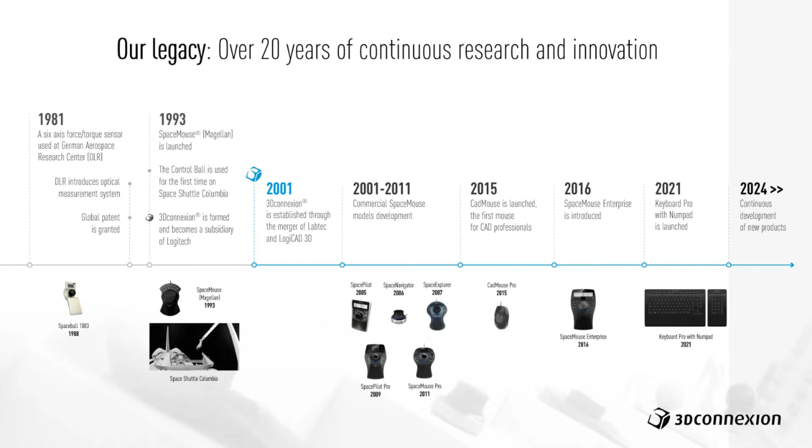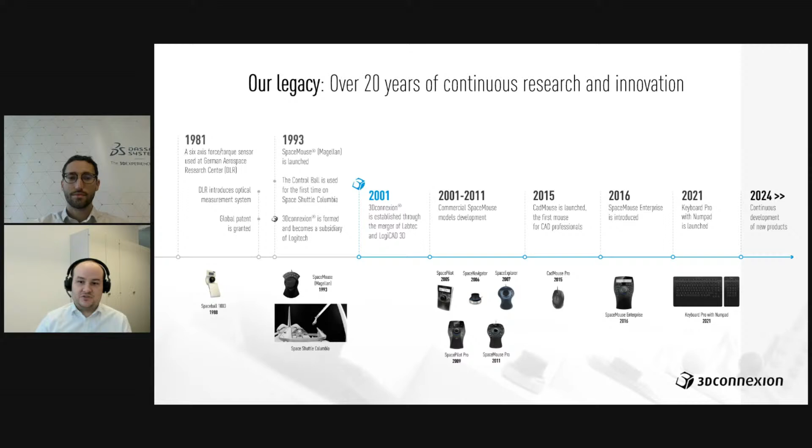Today, we are a globally established company with offices in Germany, Japan, Monaco, Poland, the US, and with partners and customers all over the world. This actually makes us the leading manufacturer of high-quality ergonomic hardware and powerful software for users of 3D applications. Okay, this is already a rich story. So, can you tell us a little bit more about your products?

Certainly. Let me first start with the SpaceMouse family. We currently have 5 different models in our portfolio. From the small entry-level devices, such as the SpaceMouse Compact and its wireless sister, the SpaceMouse Wireless, to our professional workhorses, the SpaceMouse Pro and its wireless counterpart, the SpaceMouse Pro Wireless, all the way up to the top-of-the-line product, SpaceMouse Enterprise. The 2 wireless devices are the newest in the portfolio, and they now also come with Bluetooth and USB-C.

In addition to the SpaceMouse, we also have the CadMouse in our portfolio. These are computer mice, so 2D mice actually, that have been specifically developed to meet the requirements of demanding CAD software users. The right-handed user uses this with the right hand while simultaneously navigating the SpaceMouse with the left hand. So this means working with 2 hands. We offer the CadMouse both wireless and wired in a compact and standard size, as well as a left-handed version.

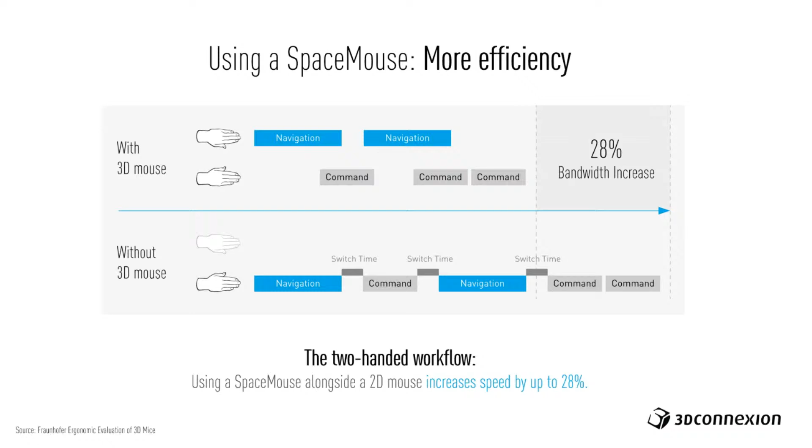Yes, let's do so. I've only one more slide before we dive directly into a quick demo of the SpaceMouse. What you can see on this slide are the results of a study from 2018 that looked at the two-handed CAD workflow with SpaceMouse and CadMouse. For a right-handed user, SpaceMouse on the left hand, CadMouse on the right hand. The SpaceMouse was used for navigation, and the CadMouse used for command input.

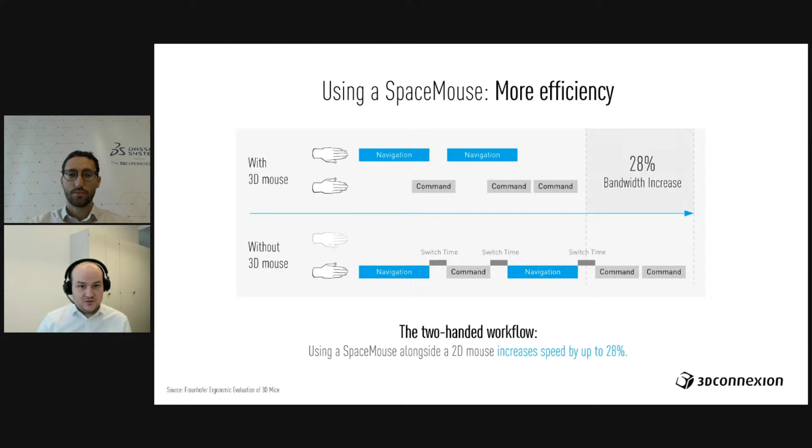To put it in a nutshell, it can be seen that the parallel navigation and execution of commands greatly reduces the strain on the hand caused by the standard 2D mouse, and it increases efficiency at the same time.

Okay, yeah, you're right. This is where our collaboration really makes sense, actually, because we share the same goal of increasing the productivity of designers and engineers through an efficient workflow. And I even know colleagues at Dassault Systèmes who are enthusiastic advocates of the SpaceMouse and use it on a daily basis. Cool. Yeah, but exactly. Now let's jump into the demo so we can finally see the magic I've been talking about.

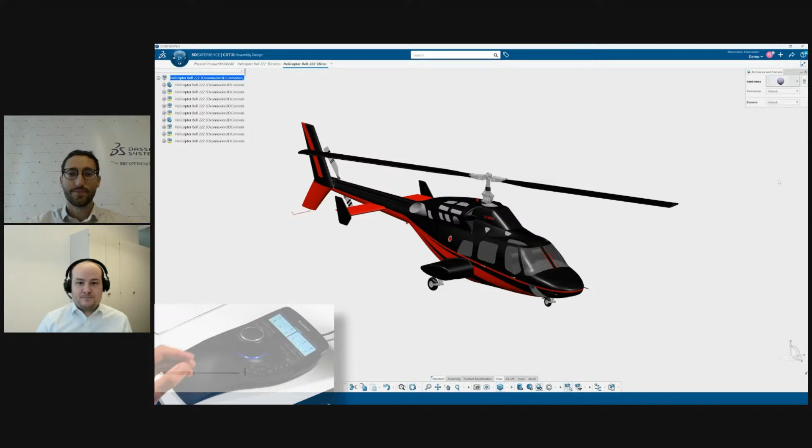The heart and magic of the SpaceMouse experience is its intuitive navigation. The cap of the SpaceMouse corresponds to the object on your screen, allowing you to move along the axis simultaneously. You can see here it's very fluid, and you can orbit this helicopter very nicely.

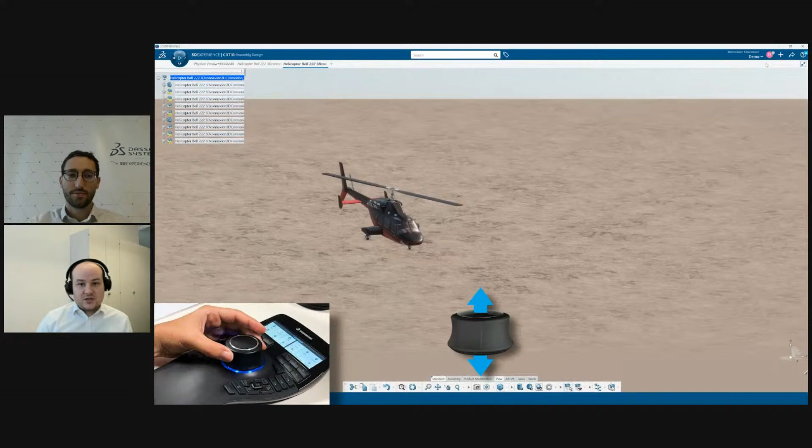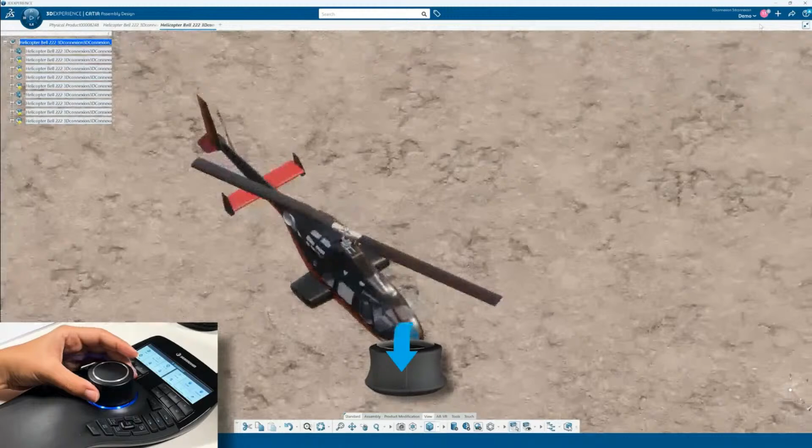This means moving the cap up and down, towards you, away, twisting, or tilting, or any combination of these movements moves your object in the corresponding direction. The cap is very pressure sensitive—the amount of pressure you apply determines the speed and extent of the movement, allowing for very fine control.

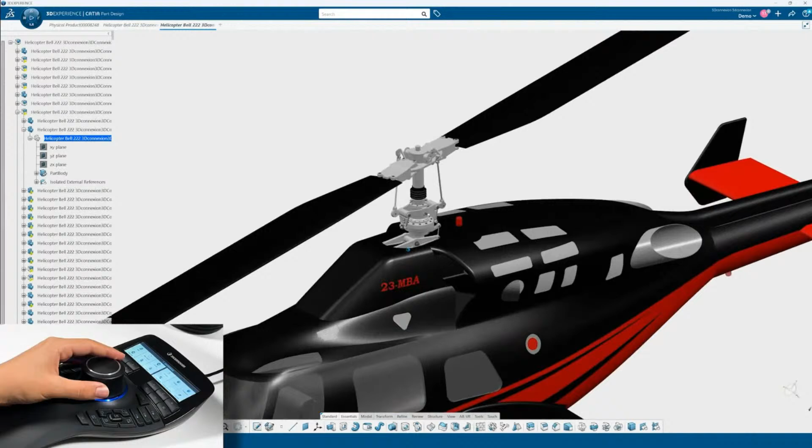Navigating within an assembly becomes very intuitive with the SpaceMouse. The precise sensor makes navigation smooth, comfortable, and highly immersive. As you can see, it is very easy to zoom into a detail or examine difficult angles. This allows you to understand and explore your model in a way that is very hard to reach with a standard mouse. The deep understanding gained through the SpaceMouse helps to find solutions and avoid mistakes.

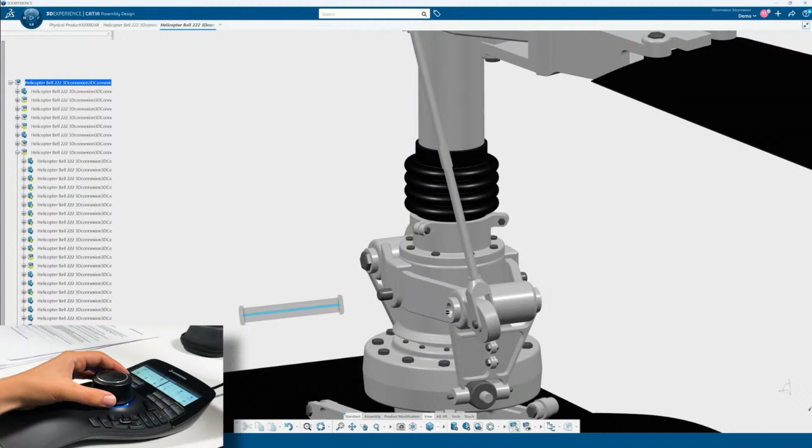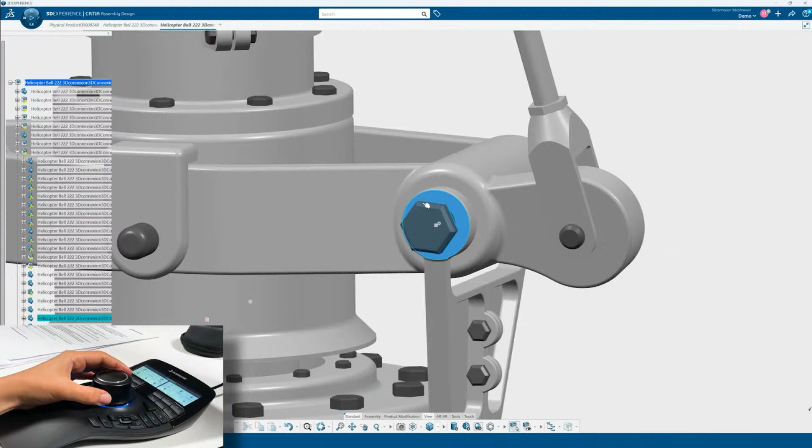In CATIA specifically, the SpaceMouse makes positioning and inserting parts easy. Here, the cap allows you to even move parts within an assembly independently of the rest—so you see the helicopter stays and the bolt is moved with the SpaceMouse cap. It is very intuitive to navigate around the objects, zoom into a hidden face, and select parts to apply constraints, all with fluid and natural motions. This way, the SpaceMouse enhances your workflow by providing precise, intuitive control over your CAD environment.

Yeah, this is a very nice example, and I recognize the beautiful model from my colleague Alain Dugousset. Very beautiful. Yes, amazing. So in this way, you keep total control of your model by making the most precise adjustments possible to design and validate right the first time. Yes, exactly.

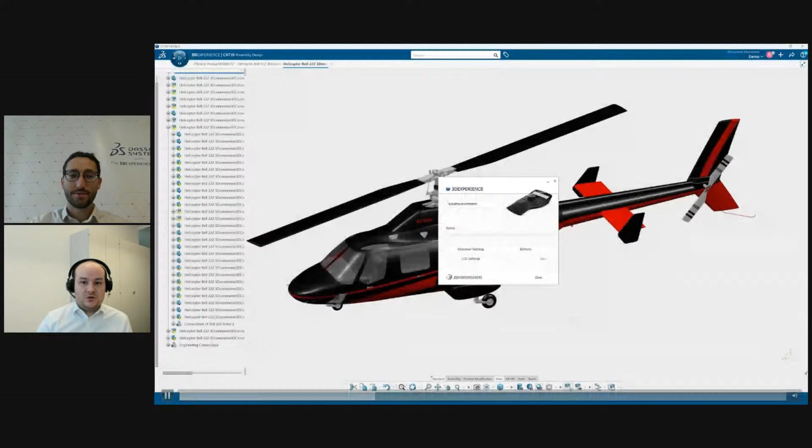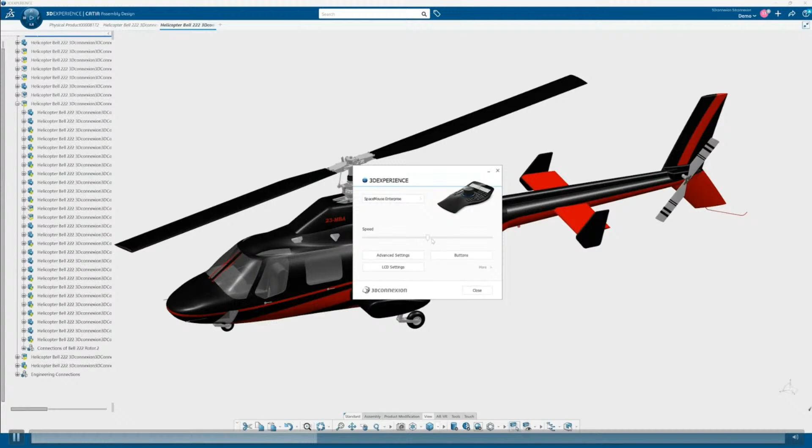And if you want to change settings, you can adjust all the navigation settings to perfectly fit your needs. For example, specific axes can be locked or unlocked depending on the task at hand. You can also invert the direction of movement or customize how different movements of the cap should behave within CATIA, and customize the speed per axis to match your personal preferences.

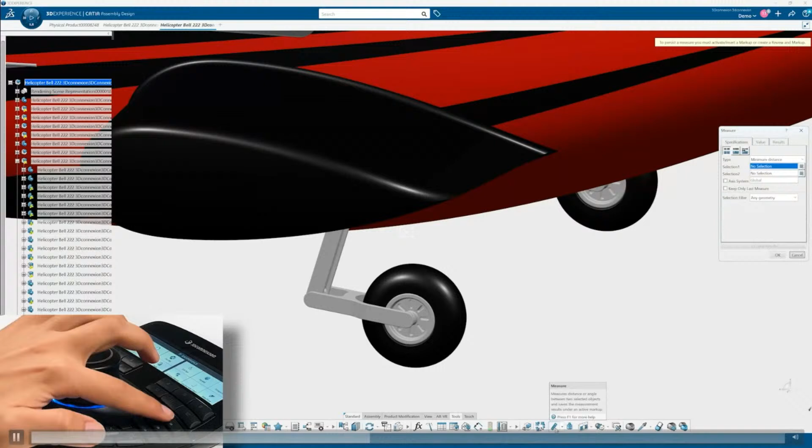Now let's move to another aspect of the navigation, and that's using the keys. Often we have favorite views, and we need to switch continuously between them. With the custom view keys, you can save your personal views and switch between them instantly. For example, we can save view 1, the first wheel, and view 2, the second wheel, then instantly switch to the first wheel, perform a measurement, switch back to the other wheel, and perform the same measurement. This greatly enhances your efficiency and precision in your workflow.

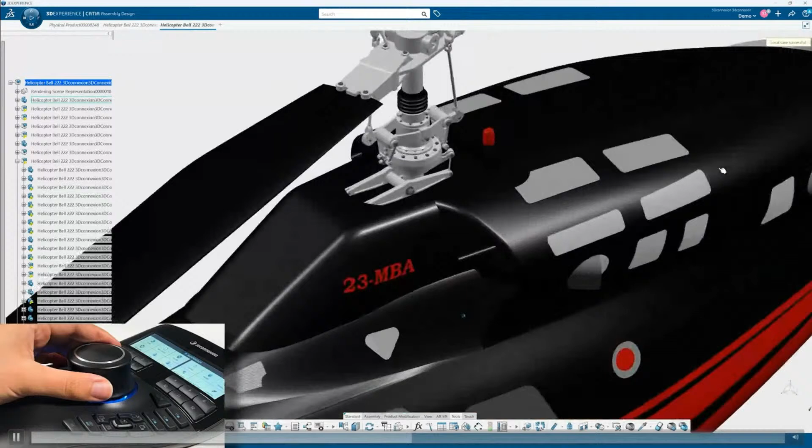With the SpaceMouse, you also have other view options that are handy in your workflow. For example, if you zoom in too much and got lost in your assembly, you can instantly center your model with the Fit key. Additionally, the Quick View keys provide one-touch access to standard views. Here we switch from front to rear, then top, right, and ISO, all with just one press each time.

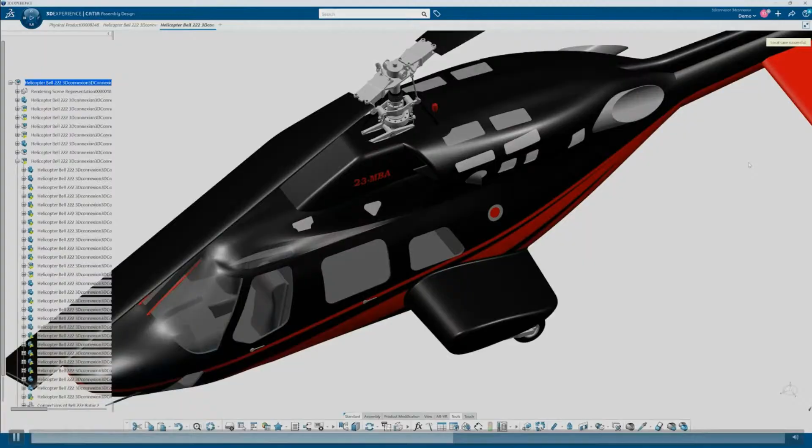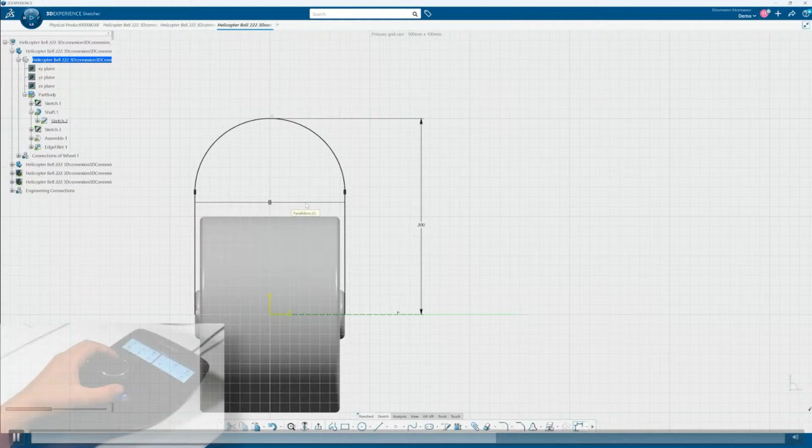Sometimes you need to navigate in 2D or limit certain movements when you're in a sketch, like rotation. With the SpaceMouse, you can easily lock the rotation using the rotation lock key. You can also adjust your settings to activate or deactivate specific axes. In CATIA specifically, the SpaceMouse even recognizes 2D environments like your sketch and automatically locks the rotation for you, allowing precise control and focus on your work.

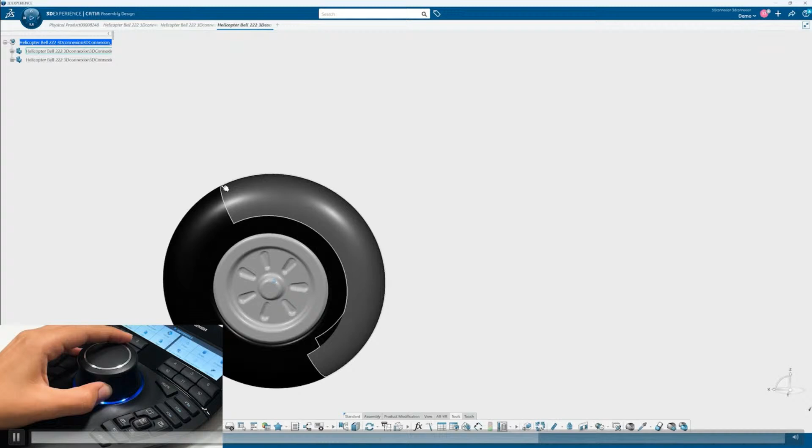On the left side of the SpaceMouse Pro and SpaceMouse Enterprise, you find the keyboard modifiers, and they minimize switching between the keyboard and the SpaceMouse. For example, you can quickly select a part, delete it, and continue navigating without any interruption, so you don't need to move to the keyboard. The combination of keyboard and SpaceMouse functionality enhances both efficiency and precision in your CAD workflow.

So if I understand correctly, in addition to being more efficient, it also allows you to feel more comfortable using your SpaceMouse on CATIA by choosing the most appropriate settings.

Absolutely. And when using the SpaceMouse for the first time, you could start off with a slower speed and adjust it in the driver. Once you feel more comfortable with navigating, you can slowly increase the speed until you find your personal preference, and then just keep it there. Okay, that's great.

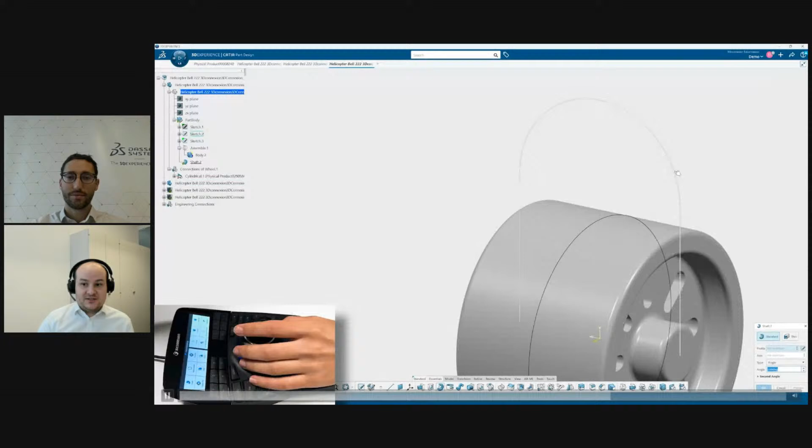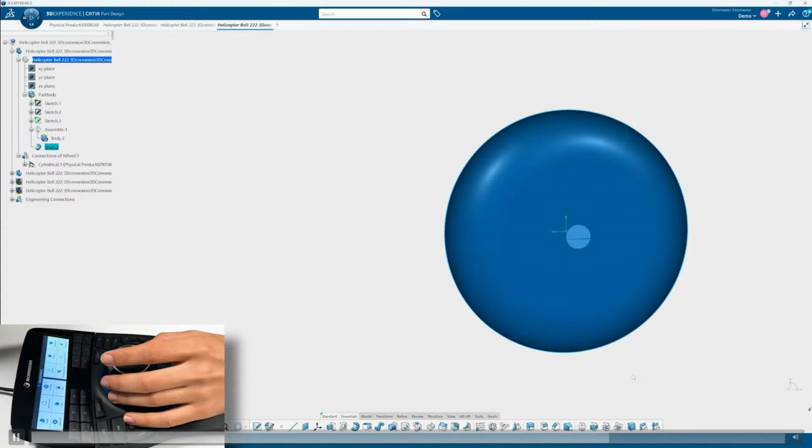Now let's talk about another powerful tool that can significantly enhance your workflow in CATIA, and those are the 3Dconnexion keys, the ones on top. These programmable keys are designed to provide quick access to frequently used functions and commands, allowing you to work more efficiently and comfortably. A standout feature of our driver is the automatic recognition of the software you're using. In CATIA, the keys come predefined with commands tailored specifically for the application in use.

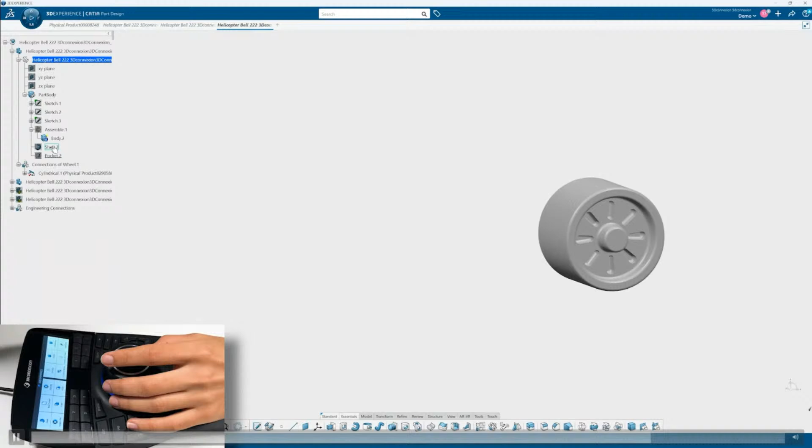Plus, they are fully customizable. You can assign your favorite commands, manage radial menus, and set up macros, ensuring your preferred tools are always at your fingertips. Another great feature is seamless application switching, so the keys automatically update as you switch between applications, providing relevant commands for the active application, whether you're moving from CATIA to another 3D tool or to software like Outlook or Word.

The SpaceMouse Enterprise also features a high-res display that shows actual icons from your application. This makes it particularly easy to switch commands that are mapped to the keys without having to remember anything.

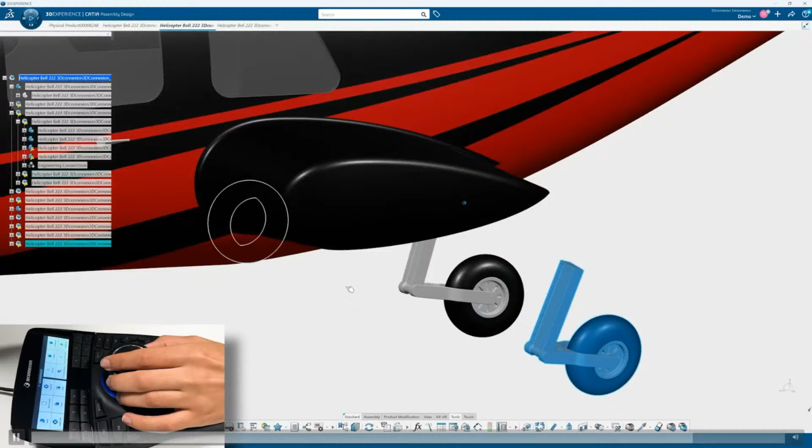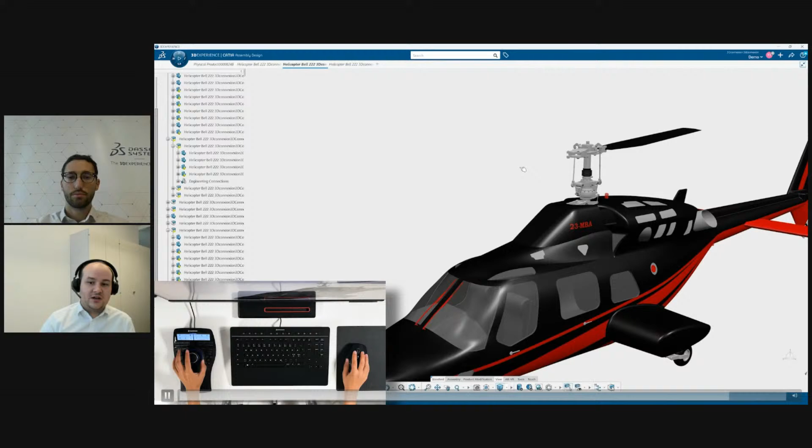To sum it up, the 3Dconnexion keys can be a game changer for CATIA users, offering automatic application recognition, extensive customization options, seamless switching, and optimal command visibility. Yes, it's like the most advanced version of your tool, with recommendations and suggestions directly incorporated. Exactly, the SpaceMouse Enterprise is a very powerful device and couples perfectly with 3DEXPERIENCE CATIA.

Yes, indeed, it's very impressive to see all these functionalities. We can see that this mouse is really made for CAD professionals and can help on all the aspects you just described, like efficiency, productivity, or workflow.

And so we talked about the SpaceMouse, but what about the CadMouse you mentioned earlier? Yes, let's also briefly talk about the CadMouse. Combining the power of a 3D mouse with a CadMouse, a 2D mouse, creates a synergy of form and function like none other.

With the CadMouse on one hand, selecting and creating with ease, and the SpaceMouse smoothly positioning objects and views with the other hand, you will experience the most ergonomic and efficient CAD workflow possible.

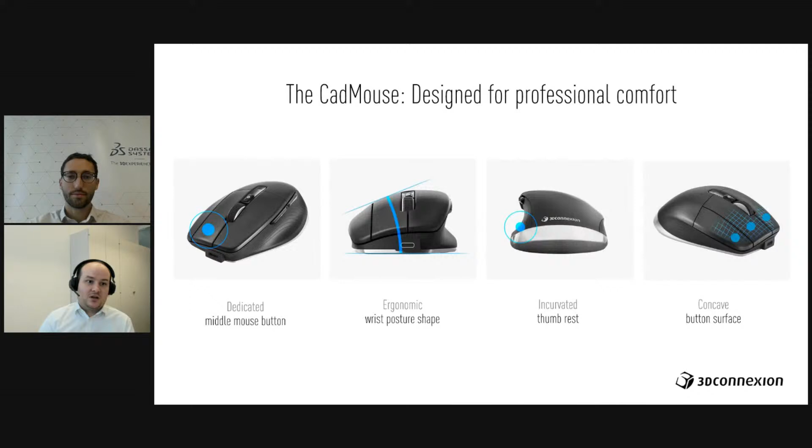Therefore, the CadMouse reflects our deep commitment to CAD professionals. While decades ago already the computer industry shifted towards simpler two-button mice, we recognized that CAD users needed something more specialized for their workflow, and we addressed this need by creating the CadMouse with a dedicated middle mouse button.

Additionally to the middle mouse button, we put special emphasis on the ergonomic design. You can see from the picture that the mouse is angled, and this way it improves the wrist posture and prevents injuries.

Of course, the mouse also comes with all the features that users would expect from a CAD mouse from 3Dconnexion. This means a high-res sensor, long-lasting switches, a high-capacity battery. I think we advertised 2 months, but I don't know when I last charged my device, actually. It has to be a long time ago. And you can actually charge it through USB-C. And of course, programmable buttons with smart features specialized for CAD work.

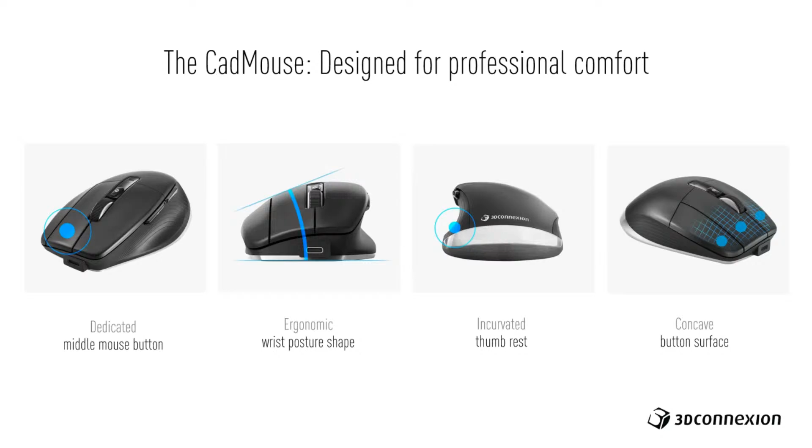Now let's take a closer look at a few of those features. As mentioned before, unlike conventional mice, the CadMouse features a dedicated middle mouse button. This provides a more comfortable and precise middle mouse click, essential for CAD applications where this is frequently used.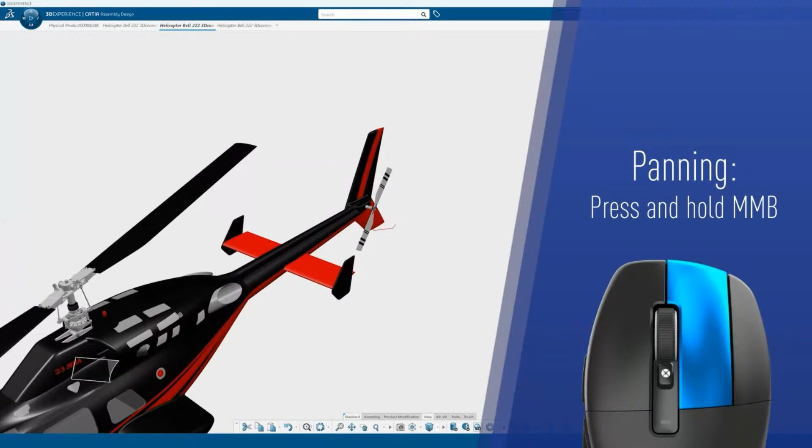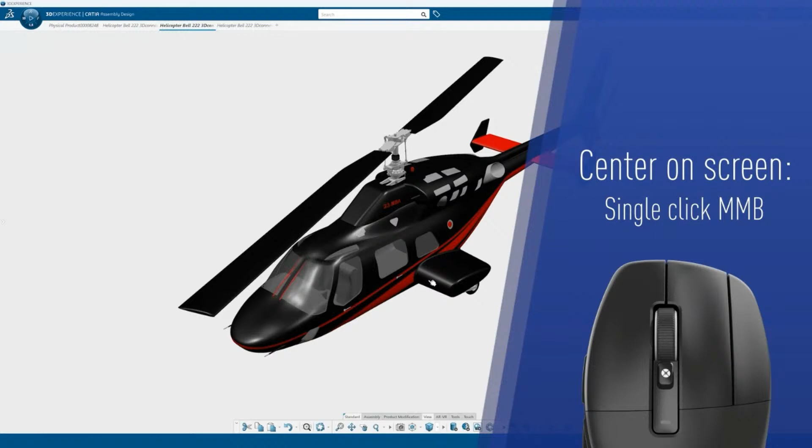In CATIA, the middle mouse button is not only an ergonomic tool for panning and rotating, but also allows for precise centering by clicking on a point on the model. And I'm pretty sure most of you already know that, and everybody who uses it does know about this functionality. But additionally, in CATIA, it also allows for easy zooming in and out by pressing the middle mouse button in combination with the right button.

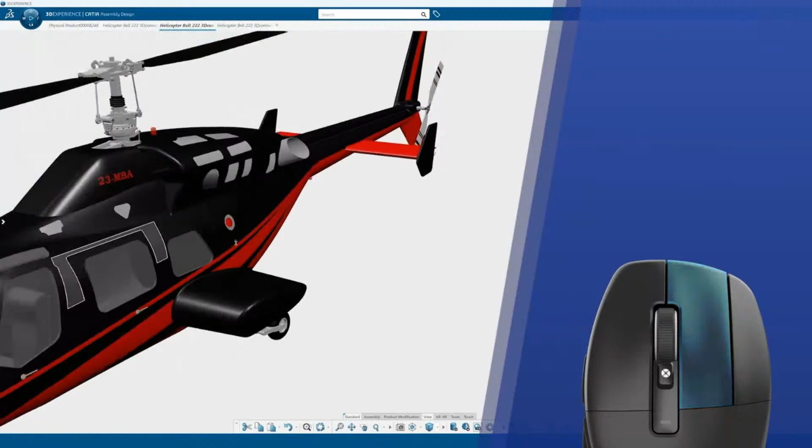And when it comes to zooming, another powerful feature that comes with the CadMouse is the quick zoom on the thumb buttons. This allows you to effortlessly zoom in and out of your geometry with a single click of the thumb button, providing detailed views exactly where you need them. It's a significant time saver and improves accuracy in complex designs a lot.

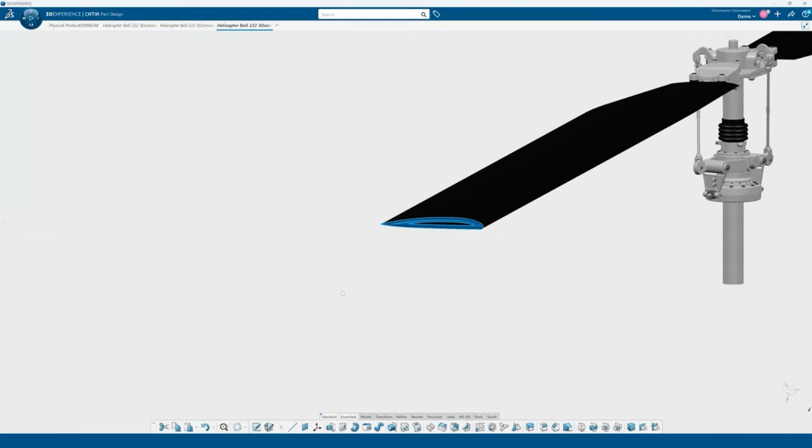To conclude, the CadMouse is more than just a mouse. It's a powerful tool designed to enhance your productivity and precision in CAD applications, and it's the perfect partner for your SpaceMouse in your two-handed workflow.

Okay, thank you very much, Christophe, for all those insights. Welcome. I hope our viewers appreciate your explanation because these tools, as you said, are specifically made for designers and engineers who use our CATIA software. And they are really useful to be more efficient without losing time or quality in the design process, which, as we know, is very important to ensure that the right model is ready for the market as quickly as possible.